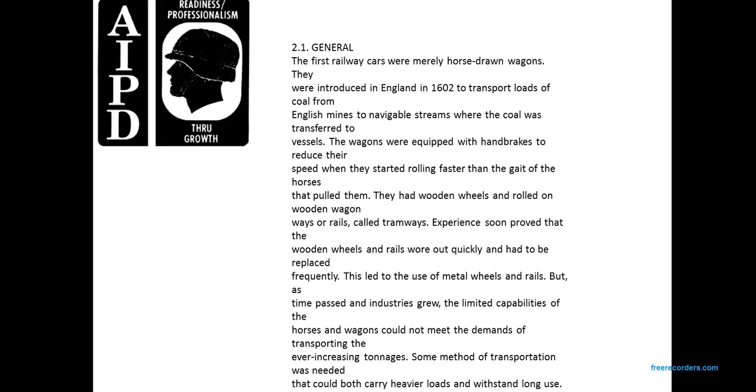The steam locomotive was built to replace the horse, with wooden wagon roadways giving way to iron rails. Later, steel rails were developed. Railway cars were designed and built to replace horse-drawn wagons. The original railway cars were constructed to handle minimum loads, with locomotives, roadbeds, and track structures. Over the years, roadway structures have been improved and equipment made longer, more efficient, larger, heavier, stronger, and safer.

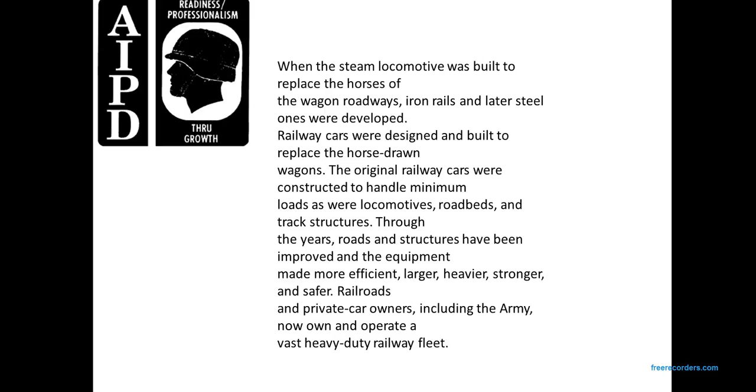Containerization is expanding continually and is being used increasingly; with containers on a flat car, it becomes an all-purpose car. The advantage is fast loading and unloading, freight handling labor is reduced, and damage to the lading is decreased.

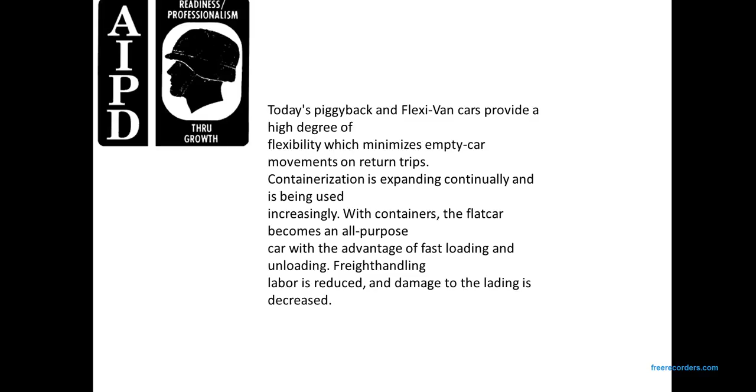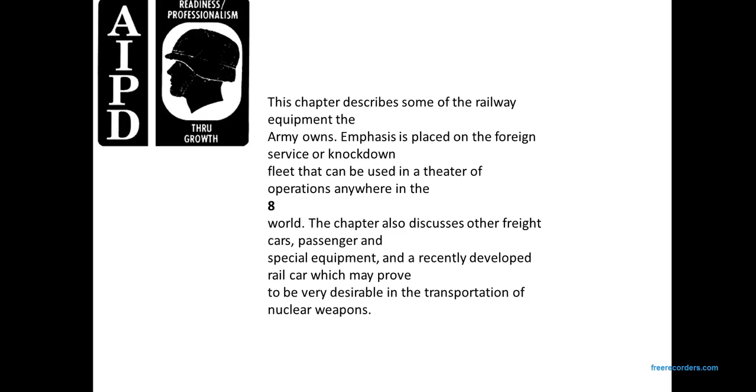This chapter describes some of the Army's railway equipment, with emphasis placed on foreign service knockdown fleets that can be used in theater operations anywhere in the world. The chapter also discusses other freight cars, passenger special equipment, and a recently developed rail car which may prove very desirable in the transportation of nuclear weapons.

2. Rolling Stock. Types of rolling stock: railway rolling stock is classified into 4 types: house cars, open top cars, flat cars, and tank cars. All railway cars, except flat cars, have 6 general components: trucks, brake gear, draft gear, couplers, underframe, and superstructure. The flat car has no superstructure.

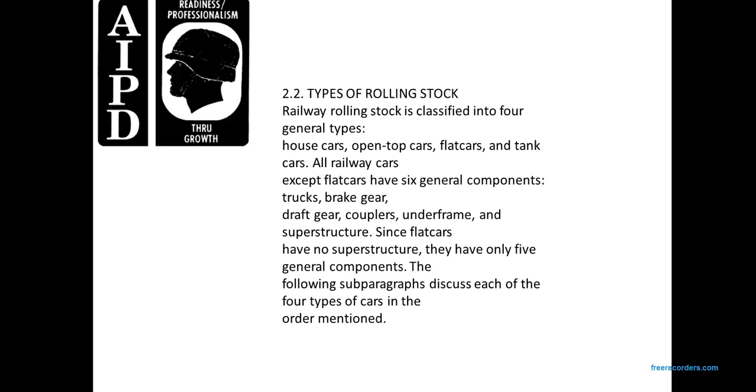The flat car has only 5 general components. The following subparagraphs discuss each of the 4 types of cars in the order mentioned. The house car has an enclosed superstructure with sides, ends, roof, usually doors, vents, ladders, and roof running boards. Boxcars, refrigerator cars, and cabooses are examples. Since boxcars and refrigerator cars are discussed in paragraphs 2.13 and 2.19, only the caboose is described here. A caboose is the car attached to the rear of a freight train.

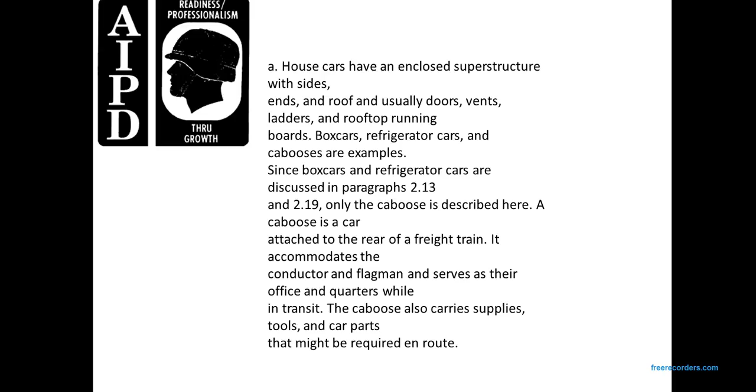It accommodates the conductor and flagman, serving as their office and quarters while in transit. The caboose will also carry supplies, tools, and car parts that might be required en route.

Open top cars, such as the gondola, ballast cars, and hoppers, normally have sloped ends. However, both types of hopper cars, covered and open top, are included in the open top category. The following subparagraphs describe the hopper and ballast car types; the gondola is discussed in paragraph 2.12. Covered hoppers are permanently enclosed, weather-tight cars with fixed sides, ends, and roofs, having openings with weather-tight covers and doors provided in the roof or sides from which the car is unloaded.

For unloading, the car must have openings at the bottom with tight fittings. The covers, doors, ports, or valves in the roof or side openings are where the freight is discharged. Covered hoppers may be partitioned into compartments.

Open-top hoppers are similar to gondolas except that they have higher sides and ends, and generally an interior with self-clearing features, using sloping construction at the bottom of the compartments, with openings at the ends equipped with doors providing discharge for the car's contents. Open-top hopper cars come in many types that vary according to size and commodities carried. Some have twin hopper pockets, while others are quadruple ones, each with doors for discharging the lading.

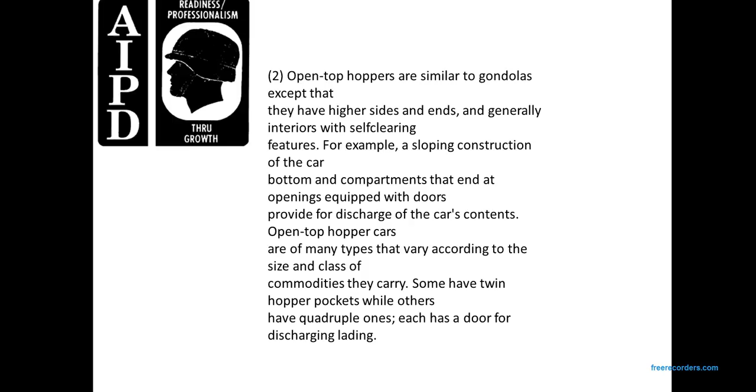Ballast cars are similar to low-side gondolas, except the load may be discharged from the side. Some are referred to as side-dumping gondolas. These cars are used for hauling ballast, sand, gravel, and small loads of coal.

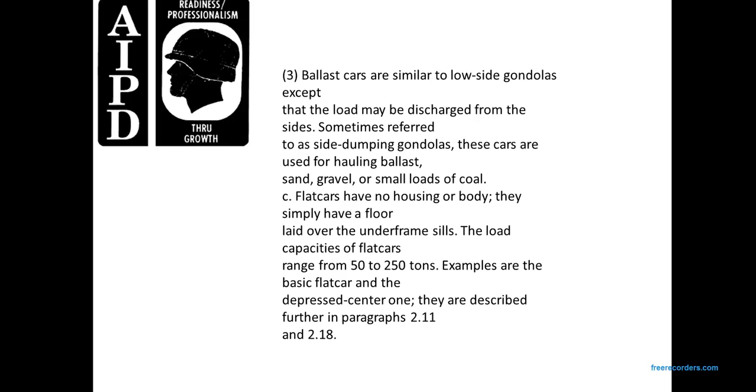Flat cars have no housing or body; they simply have a floor laid on the underframe sills. The load capacity of flat cars ranges from 50 to 250 tons. Examples are basic flat cars and depressed center ones, described further in paragraphs 2.11 and 2.18.

The tanker cars have tanks mounted on special underframes. They may transport liquid or semi-liquid commodities ranging from milk to TNT.

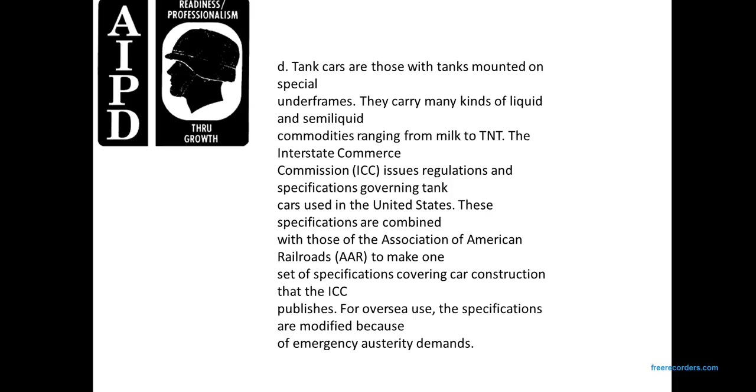Specifications are modified because of the emergency austerity demands. Section 2.3: The freight equipment of the military use.

The railway car being used for military purpose probably occurred during the Civil War, when mortars were permanently mounted on flat cars moved into the area to support troops. In 1917, five naval railway batteries were built and shipped to France for use in World War I campaigns. Each battery consisted of a gun car carrying 14-inch guns and ammunition, workshop, kitchens, berthing cars, and the cars of each battery were probably the first railway cars used entirely for military purpose.

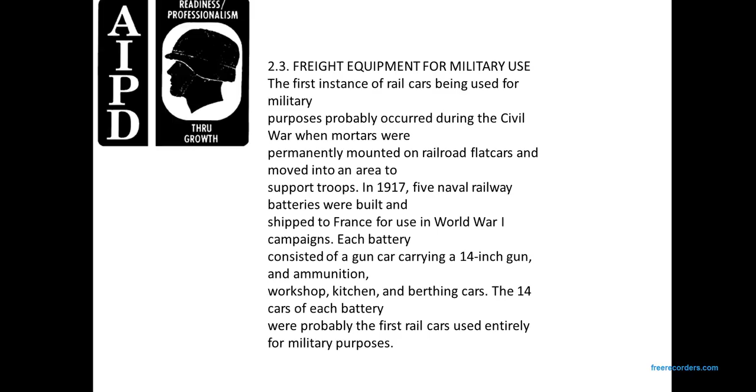Army railway motive power rolling stock built for use in domestic service differed little in design from standard U.S. commercial rail equipment. In comparison to foreign equipment, however, it generally is larger and heavier.

When World War II began, European rolling stock had a smaller carrying capacity and was scarce in all theater operations. Many cars were hurriedly designed and built in the United States and shipped overseas, knocked down to save shipping space. A few American cars were modified for use on the European railroads.

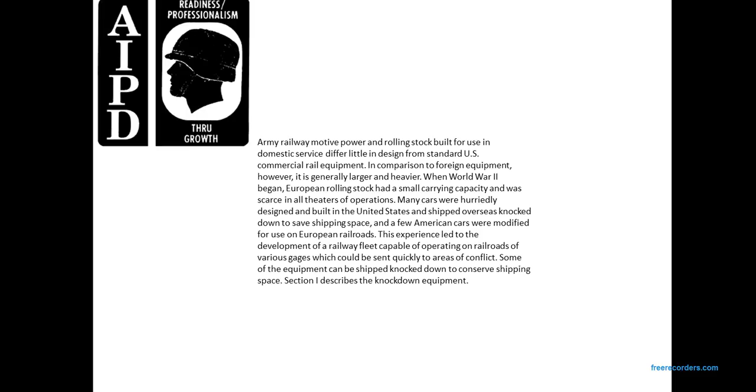For example, experience led to the development of a railway fleet capable of operating on railroads of various gauges, which could be sent quickly to conflicting areas. Some of the equipment could be shipped knocked down to conserve shipping space. Section 1 describes the knockdown equipment: Knockdown Fleet, Section 2.4, General.

Experience of World War I and II showed that foreign railway systems were incapable of sustaining combat operations, because of the capacity amount of foreign railway equipment was not enough for military purposes for the U.S. Army. It was realized that the Army had to be prepared to produce its own motive power and rolling stock should it engage the enemy on foreign soil.

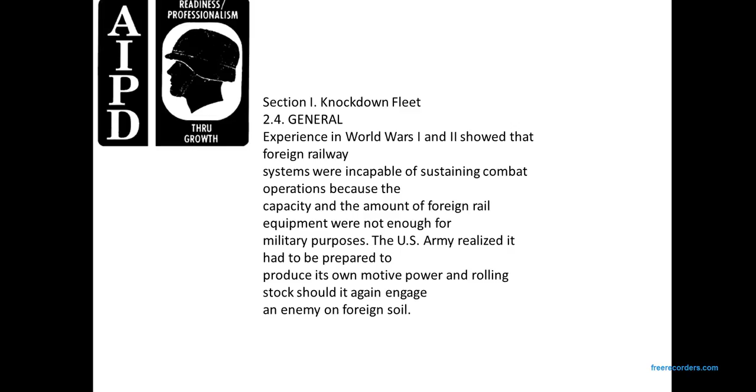Soon after World War II, the Army began to develop a railway fleet, suitable for use in theater operations.

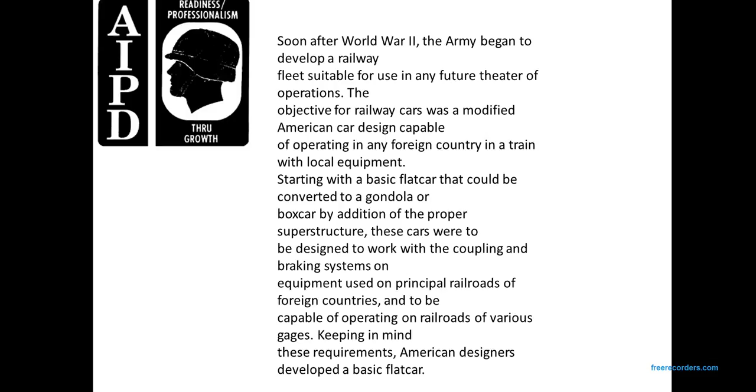Keeping these requirements in mind, American designers developed a basic flat car. In addition to domestic service equipment, the Army inventory contains a knockdown fleet of 40-ton equipment designed and built primarily for emergency overseas service.

Another fleet for use on narrow gauge track in foreign theaters was proposed but not procured. It was to consist of a 76-ton diesel electric locomotive, 30-ton gondolas, 30-ton flat cars, 55-ton depressed center cars, and 40-ton fleet cars, consisting of more than 11,000 items of motive power, rolling stock, and storage.

Various Army depot installations. Paragraphs 2.5 through 2.10 discuss generally the construction components of the cars, the foreign service fleet, and basic procedures for assembling knockdown cars. The remainder of the section, accompanied by figures, describes the car fleet that can be assembled and partially assembled in the theater, and explains their assembly and conversion.

2.5, Construction. Because of the expected shorter life of emergency equipment used in theater operation as compared with standard equipment, the fleet was constructed in a simple, economical as military standards permit. The physical characteristics of foreign railroads would limit the capacity and dimensions of the equipment.

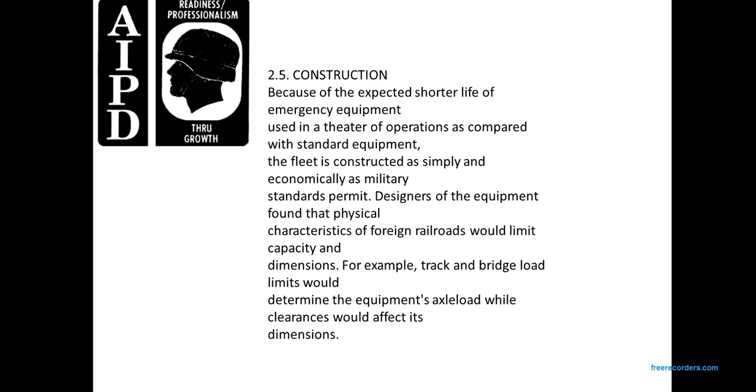For example, track and bridge load limits would determine the equipment's axle load, while clearance would affect its dimensions. The designers decided that a capacity of 40 tons was best to transport military supplies and equipment on the standard to broad gauge of 56.5, 60, 63, and 66 inches.

Design modifications were based on the equipment's shorter life expectancy and regulations expected to govern rail operation in theater. Emergency overseas equipment is designed to meet the clearance and limitations of foreign railroads.

The major assembly components of the different types of knockdown and interchangeable cars are discussed in paragraphs 2.6 through 2.9, which cover the four basic components of a railway car of the knockdown fleet, with the exception of tanker cars. Paragraph 2.10 discusses their assembly.

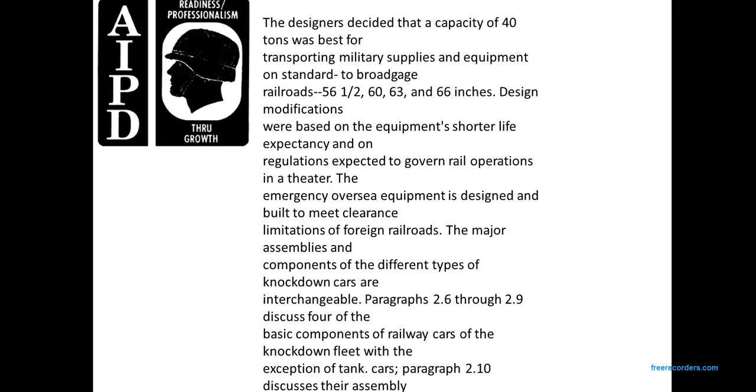The multiple gauge trucks enable the knockdown fleet to operate the railroad on various widths, whether standard or broad gauge.

The trucks can be adapted for different gauges, either the entire truck may be removed and another substituted, or changing the gauge of the wheel once set on the multiple gauge trucks can be accomplished only by general support maintenance units, since the wheel cannot be pushed in or out at will; a heavy-duty wheel press is required.

The multiple gauge trucks can be applied to locomotives, wrecker and locomotive cranes, snow plows, and other railway equipment. Trucks and wheels used in the equipment of the fleet conform to the standards of the U.S. Army and the Association of American Railroads, and are completely interchangeable among cars of the same capacity. However, only the major assemblies are interchangeable among the trucks themselves. A diagram of the typical railway truck is shown in Figure 2.1.

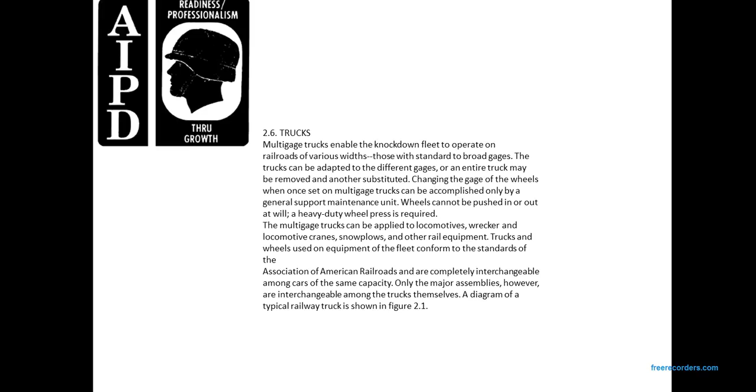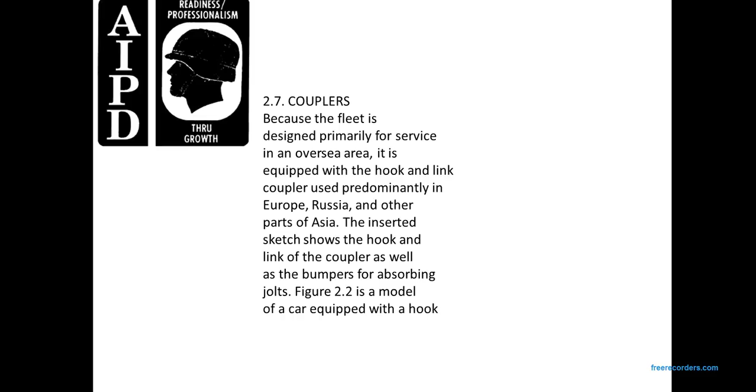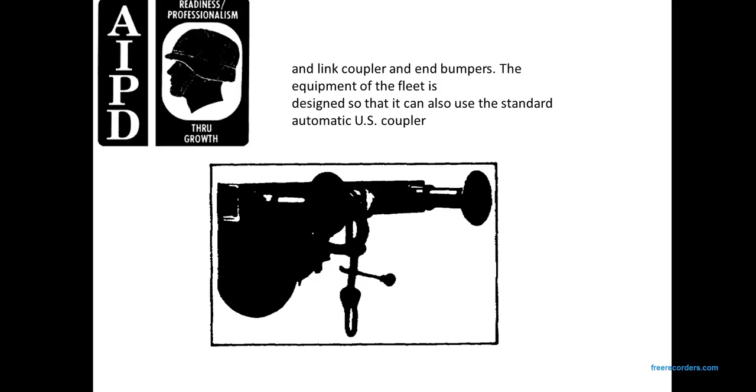Equipment of the fleet uses steel underframes fabricated and drilled in car builder shops in the United States. All underframes for flat cars, gondolas, and box cars are assembled in the same way. A wooden plank floor is laid over the underframe.

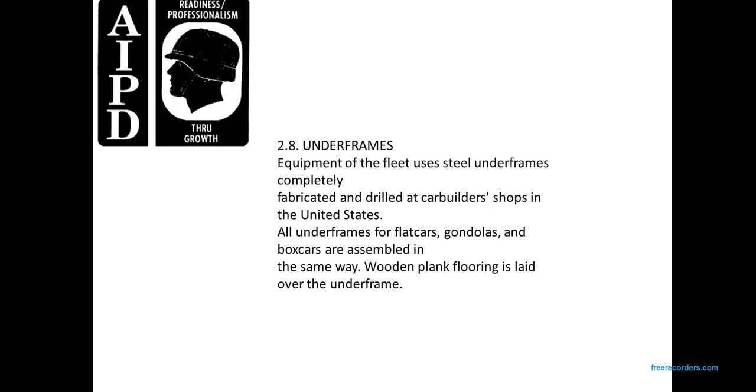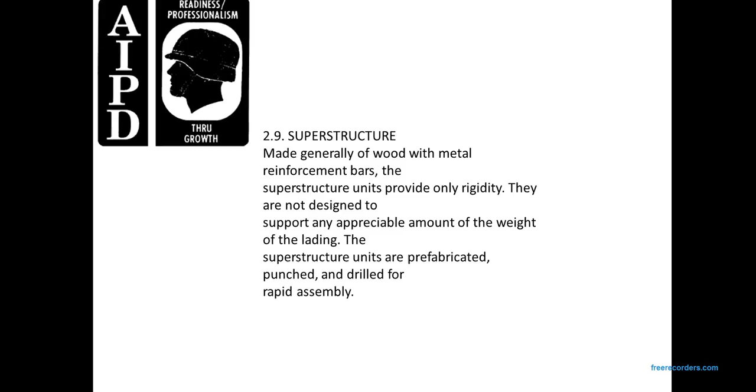2.9, the superstructure, made generally of wood and metal reinforcement bars. Superstructure units provide only rigidity; they are not designed to support an appreciable amount of the weight of the lading. Superstructure units are prefabricated, punched, and drilled, and reassembled for rapid assembly.

2.10, the general method of assembling a car from the knockdown, with the exception of the tank cars, follows: first, assemble the trucks and the underframe. Then, install miscellaneous items of the underframe, including air braking equipment applied to the underframe and end sills, such as the coupling draft gears, buffers, and blocks. Next, mount the underframe assembly onto the trucks.

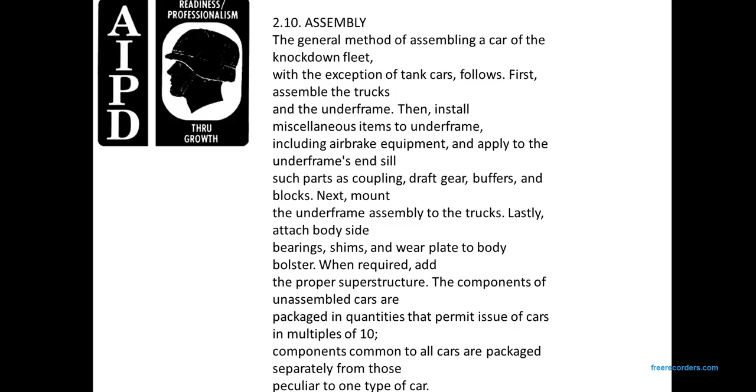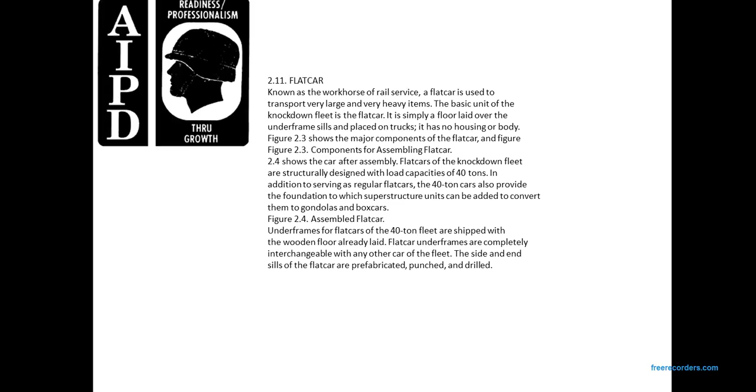2.4, the assembled flat cars. Underframes of the flat cars of the 40-ton fleet are shipped with a wooden floor already laid. Flat car underframes are completely interchangeable with any of the other cars of the fleet. The side and end sills of the flat car are prefabricated, punched, and drilled. This is the underframe of a flat car.

In the theater, the flat car is generally used for very early rail operations. When theater activity stabilizes, requirements to increase transportation and supply need protection from weather or pilferage, so the flat car can be converted to a closed car. After conversion, weight of the lading is still carried by the car bed; the superstructure provides rigidity, not support. Because of its versatility, the flat car is the backbone of the fleet.

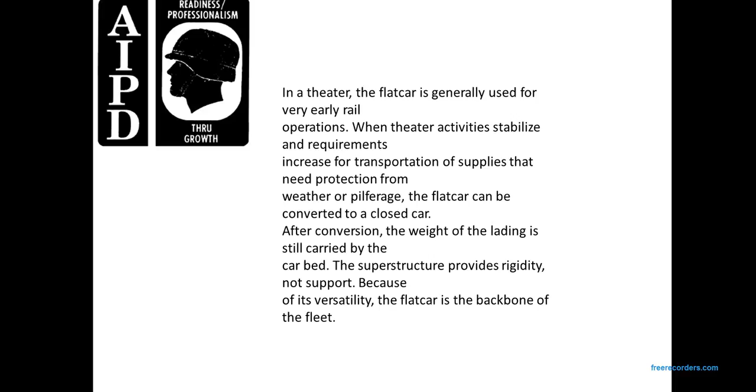2.12, in addition, by adding the sides and ends, the basic flat car becomes a gondola, either high-sided at 48 inches or low-sided at 18 inches. Gondolas may be assembled depending on the height desired; the only difference in the two cars is the height of the superstructure.

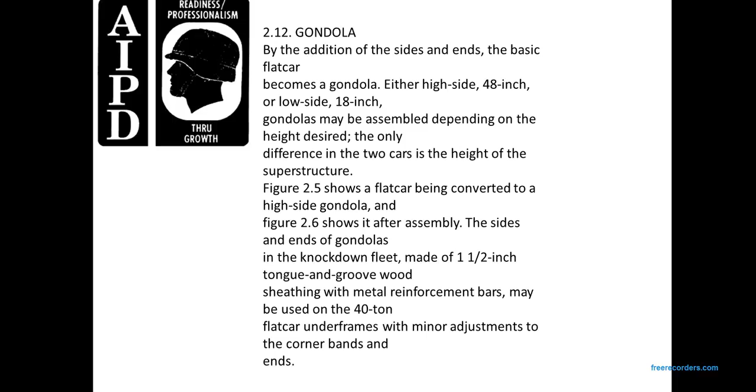This shows a flat car being converted into a high-sided gondola, and after assembly, sides and ends of the gondolas in the knockdown fleet made of 1 1/2 inch tongue and groove wood sheathing with metal reinforcement bars may be used on the 40-ton flat car underframes, with minor adjustments of the corner bands and ends.

This is a gondola car. The conversion of flat car to gondola generally involves positioning sides and underframe sills, securing them with fastening, handholds, positioning ends, assembling, and securing corner posts on all corners of the car. The gondola can transport a variety of heavy bulk items.

They are used primarily for carrying such materials as coal, ore, stone, lumber, iron, steel products, and machinery. If necessary, they can be used to transport troops.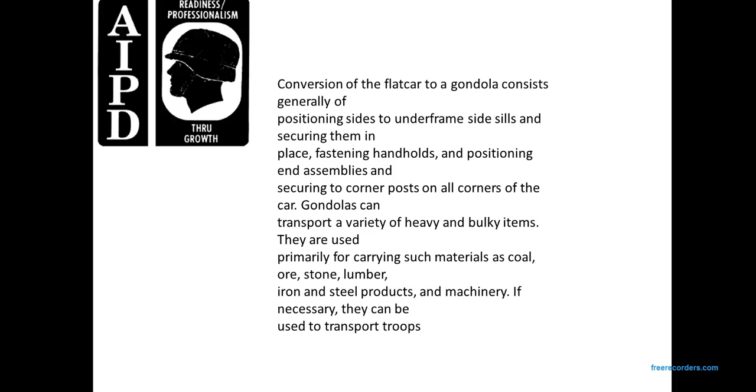2.13. Boxcars, enclosed with the sides and ends having a roof, the boxcar is designed to carry commodities that must be protected from breakage, pilferage, and weather damage, like the gondola.

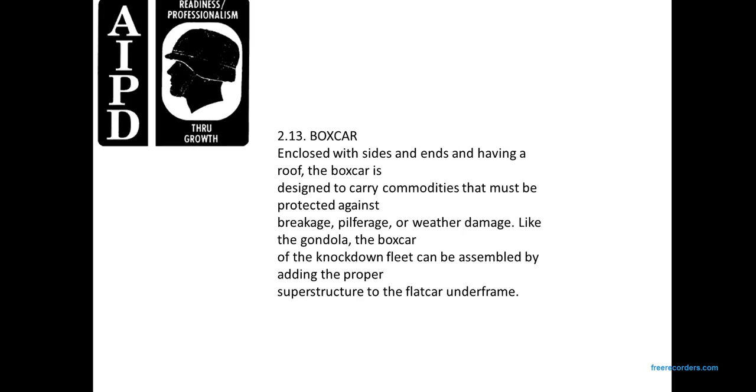The boxcar knockdown fleet can be assembled by adding a proper superstructure to the flat car underframe. Made with a light frame and plywood lining, the superstructure consists mainly of sides, ends, doors, and a roof. The sides are constructed into 4 separate sections, 2 on each side.

The ends are single units. The roof is 1 unit. The door assembly consists of a door track, threshold plate, and door.

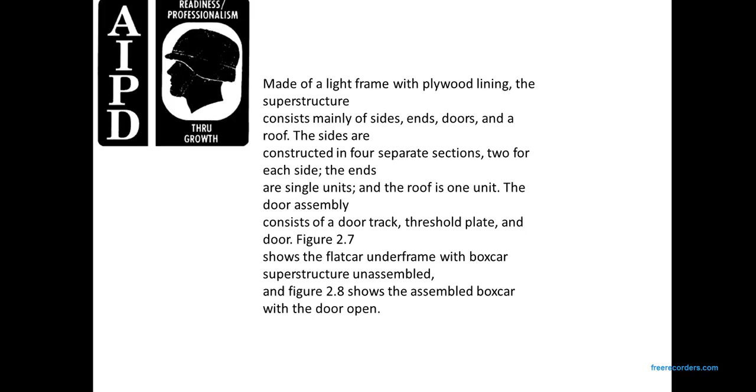This shows the flat car underframe and boxcar superstructure unassembled. Figure 2.8 shows the assembled boxcar with the door open.

To assemble the car, the underframe is assembled the same as the flat car, with the exception of the corner connection angle. A single step and the handholds of the two-sided section adjacent to one end of the car are first attached to the underframe.

The end unit, connecting the two sides, the two-side sections are attached to it and the end sill of the underframe. The same procedure is followed on the other end of the car.

When the side sections and the end units are erected, the door tracks and the doors are put in their proper place. The roof is positioned and secured to the corners and sides.

2.14. The tanker car. A tanker car consists of a tank, usually made of steel, mounted on a modified underframe. Except for the superstructure, the tanker car has components similar to the other cars. The underframe is a...

floored, and steel running boards are built on each side, even with the flooring, made with corrosion-resistant material. The tank shells may have either a single compartment or multiple ones. The ordinary tanker car has a single compartment equipped with dome safety valves and bottom outlets.

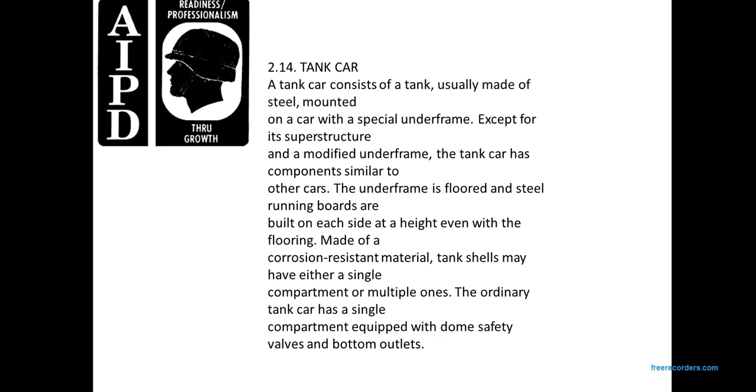Tanker cars are used for the transportation of liquid and semi-liquid commodities such as oils, gasoline, alcohols, acids, coal tar products, compressed gases, fruit juices, and milk. Tank capacities range from 5,000 to 10,000 gallons.

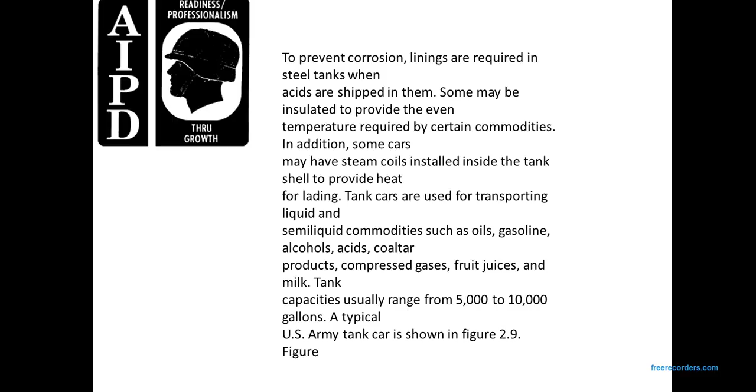A typical U.S. Army tanker car is shown in Figure 2.9. This is a U.S. Army tanker car. Tanker cars in the Foreign Service fleet have single compartments and would normally carry petroleum products.

The 5,000 gallon car operates on a narrow gauge railway, while the 10,000 gallon one runs on a standard to broad gauge track. The car manufacturer assembles the tank unit to the car underframe, along with the outlet and safety valve, with the assembly dome cover.

2.15. The experience of World War II proved that the Army must be prepared to supply its own locomotives, railway cars in a theater of operations, since many foreign countries have just enough rail equipment to support their own needs.

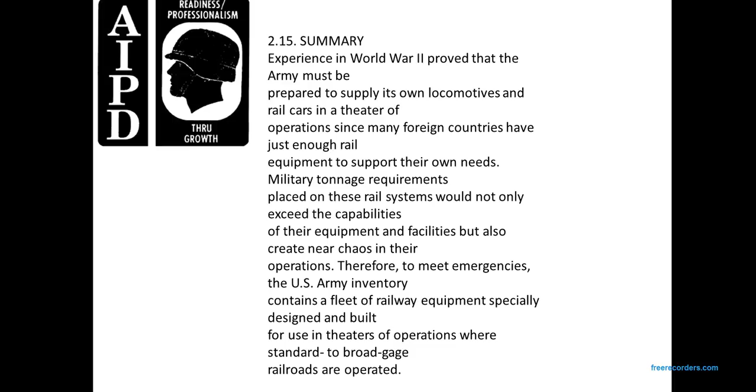Military tonnage requirements placed on their rail systems would not only exceed the capabilities of the equipment and facilities but also create near chaos in their operations. Therefore, to meet the emergency, U.S. Army inventory contains a fleet of railway equipment specially designed and built for use in theaters of operations where standard to broad gauge are operated.

In developing the Foreign Service equipment, designers found that the physical characteristics of foreign railroads would influence the size and capacity. They decided that a capacity of 30 tons was best for equipment that would operate on narrow gauge railroad, and 40 tons for equipment operating on standard to broad gauge.

However, only the 40-ton fleet was procured. The car was fabricated, punched, and drilled at the car builder's shop to provide for easy assembly in the theater.

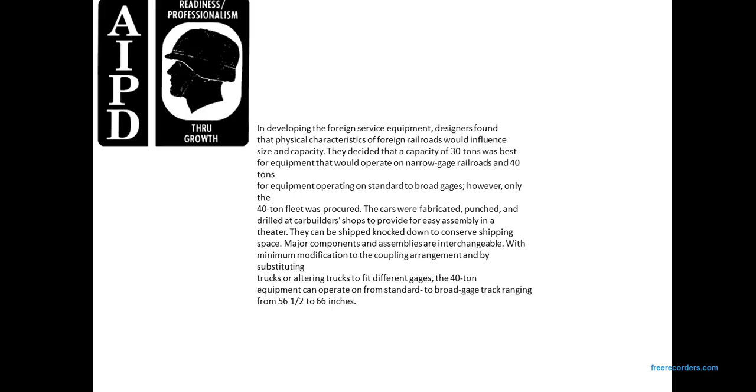They can be shipped as a knockdown fleet. To conserve shipping space, major component assemblies are interchangeable with minimum modifications to the coupling arrangement and substitution of trucks, altering trucks to fit different gauges. The 40-ton equipment can operate on standard to broad gauge track ranging from 56.5 to 66 inches.

The flat car is the basic unit of the knockdown fleet. It can serve as a regular flat car during early theater operations. When theater activity stabilizes, other types of cars are needed, so the flat car can be converted into a gondola or box car.

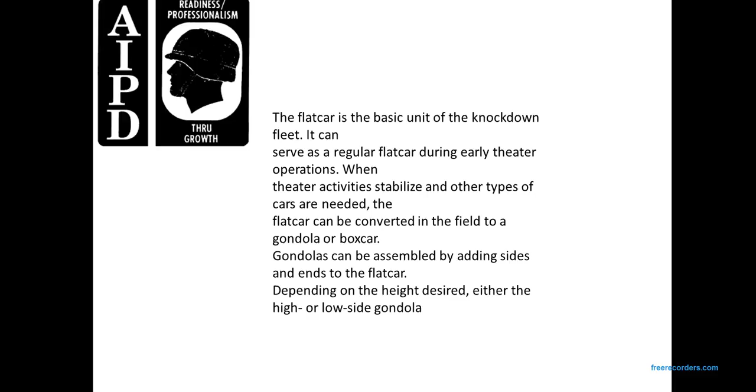The gondola can be assembled by adding sides and ends to the flat car, depending on the height desired. Either a high or low-sided gondola may be erected.

When cars are needed to carry commodities requiring protection from weather or pilferage, the flat car is converted to a box car by the addition of sides, ends, doors, and a roof.

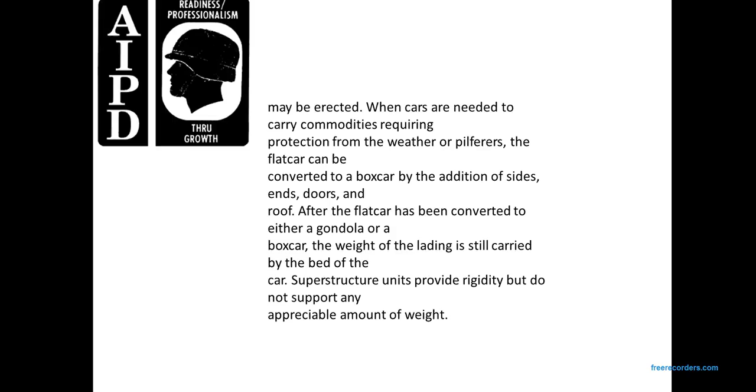After the flat car has been converted to either a gondola or box car, the weight of the lading is still carried by the bed of the car. Superstructure units provide rigidity but do not support any appreciable amount of weight.

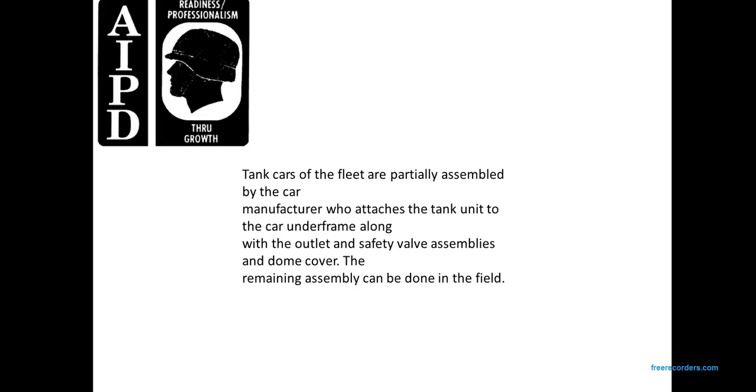Tank cars of the fleet are partially assembled by the car manufacturer, who attaches the tank unit to the car underframe along with the outlet, safety valve assemblies, and dome cover. The remaining assembly can be done in the field.

Section 2, Other Equipment.

216. General. In addition to the knockdown cars described in paragraphs 211 through 214, some heavier weight freight cars, some passenger cars, and some equipment built for special purposes are included in the foreign service fleet. This section discusses the rolling stock in addition to some of today's newer developments in rail equipment.

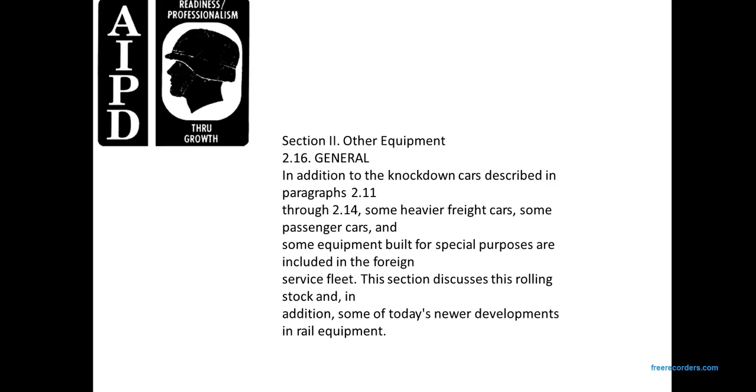217. The 80-ton flat cars. Some of the 80-ton flat cars are included in the overseas fleet, carrying ordnance and engineer equipment weighing more than 40 tons. An example is seen in figure 210, similar to the 40-ton flat cars.

Each of the cars is mounted on two 6-wheel trucks. The 3-axle trucks are used to avoid exceeding the allowable axle load on foreign railway tracks, bridges, and other rail structures, which are designed to support a certain amount of weight per axle. With a 6-wheel truck, weight is distributed evenly over a greater area than with a 4-wheel truck.

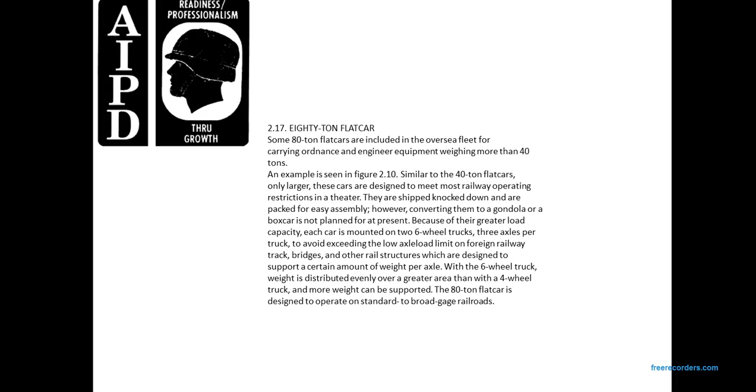218. The depressed center flat car. Flat cars with a low, depressed center are designed and built for transportation of ordnance, engineer material, and equipment that would exceed the permissible heights of loaded on regular flat cars.

This is useful mainly because of the added headroom it affords for clearance. The 70-ton depressed center flat car designed for foreign service has two 6-wheel trucks, as shown in figure 211, and operates on the standard broad gauge of 56.5 inches to 66 inches.

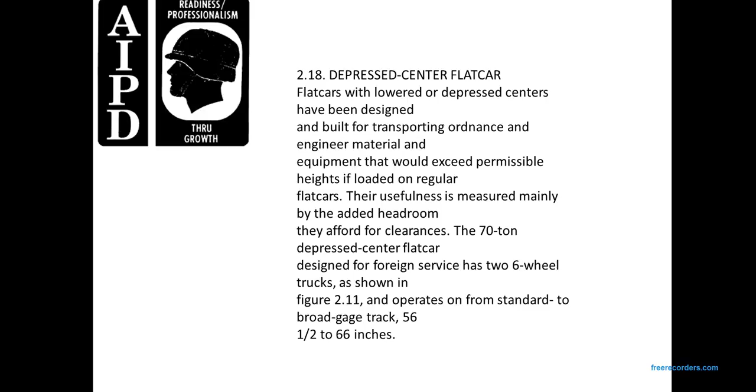219. The refrigerator car. Refrigeration is important for moving perishable items. Controlling the temperature is essential to protecting such food as fresh fruits and vegetables from freezing in transit. Refrigerator cars can be used for both purposes: to keep commodities cool and to protect them from too much cold.

A car can be cooled with ice or by mechanical means. Standard refrigerator cars resemble the box car in general outward appearance. The framework, sheathing, ends, and roof are similar to those of the standard boxcar, except that insulation has been added. On an ice-cooled refrigerator car, the roof has openings from which the ice is loaded.

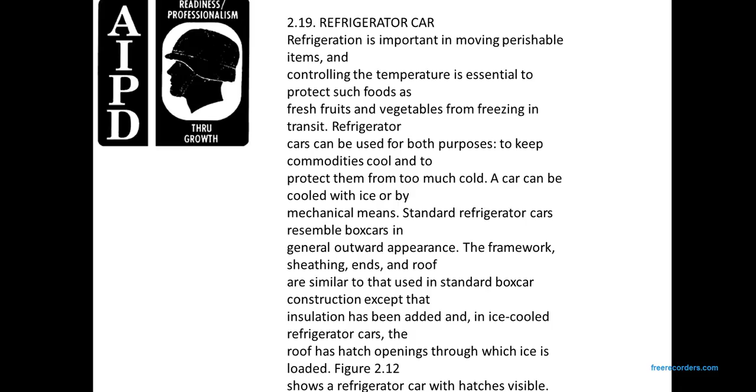Figure 212 shows a refrigerator car with its hatches visible.

Refrigerator cars developed for the foreign service fleet are 40-ton, 8-wheel, ice-cooled cars. They have the same type of underframe, trucks, brake, and coupler arrangements as the other cars in the foreign service fleet, and the superstructure outside of the sheathing is plywood.

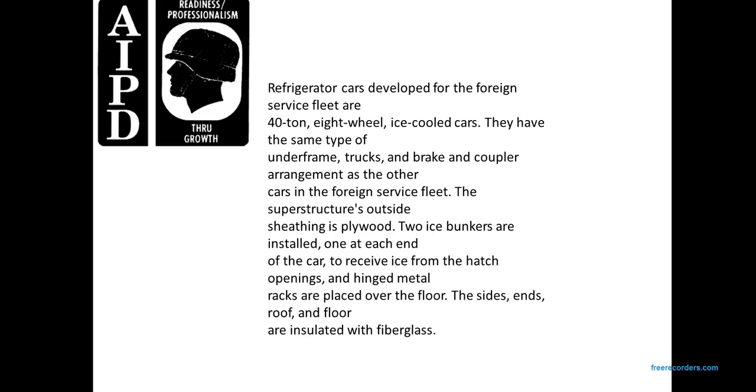Two ice bunkers are installed, one at each end of the car, to receive the ice from the hatch openings, with hinged metal racks placed over the floor. The sides, ends, roof, and floor are insulated with fiberglass. Here is a refrigerator car.

2.20. The passenger equipment car. The ambulance train cars are the only passenger equipment included in the Foreign Service fleet because of the experience of the Army Medical Service during the Korean and Vietnam Wars, the rapid development of air transportation, and the quick evacuation of the wounded from combat.

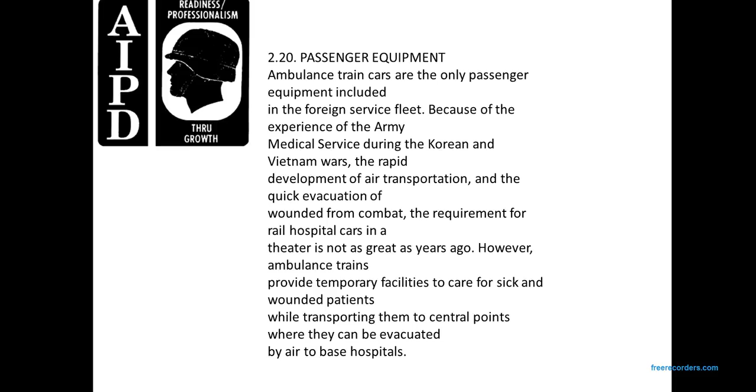The requirement for the rail hospital car in the theater is not as great as years ago. However, the ambulance train provides a temporary facility to care for sick and wounded patients while transporting them to center points where they can be evacuated to base hospitals by air.

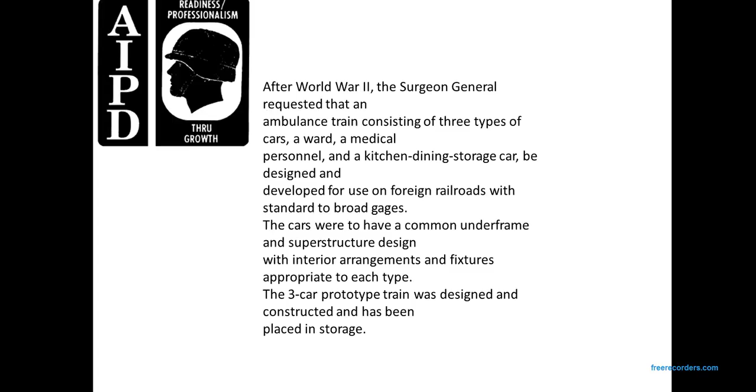After World War II, the Surgeon General requested that ambulance cars consist of three types of cars: a ward, a medical personnel, and a kitchen, dining, storage car, designed and developed for use on foreign railroads with standard to broad gauges. The cars would have common underframe, superstructure design, interior arrangements, and fixtures appropriate to each type. The three-car prototype train was designed and constructed and has been placed in storage.

The cars of the ambulance are constructed of steel and have interchangeable underframe and superstructure components. They are built to resist greater impact forces and provide maximum safety and comfort. They have multiple gauge four-wheel passenger type trucks. The coupler arrangement is designed to permit rapid conversion to another coupling arrangement for standard to broad gauge trains.

Each car is insulated, ventilated, and equipped with heating, power generating plants, and a water supply system. Only the ward car is air-conditioned. The car windows are designed for complete blackout. The three cars of the train are designed to operate as a unit furnishing complete railway ambulance facilities. Each type of car is discussed in the following subparagraphs.

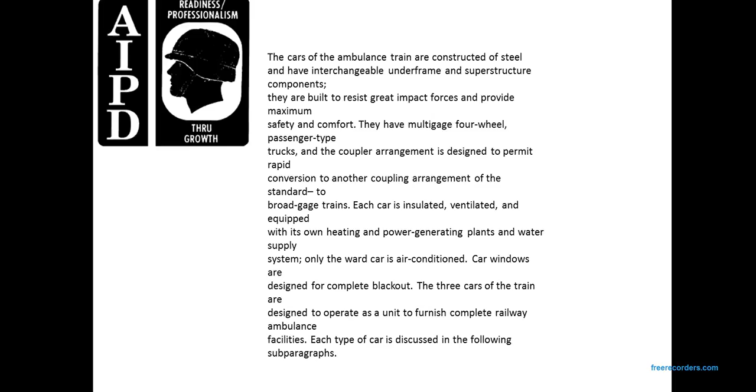A ward car is located midway on both sides of the center aisle. The ward car has tier bunks to accommodate 30 litter patients, or 12 litter and 24 ambulant patients. 6 bunks are stationary, and 24 can be converted to seats.

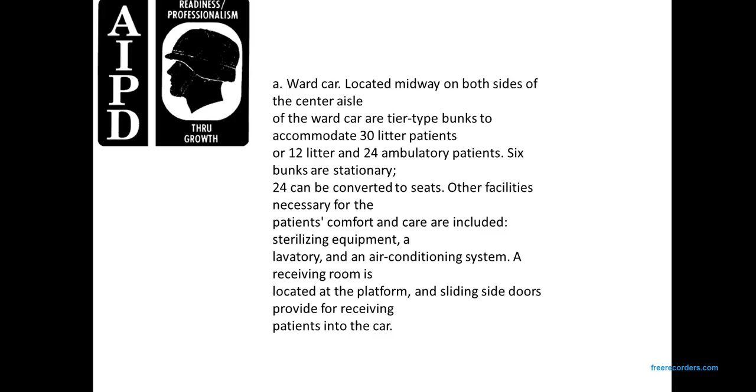Other facilities necessary to the patient's comfort and care are included: sterilizing equipment, a lavatory, and an air conditioning system. A receiving room is located at the platform, with sliding side doors provided for receiving patients into the car.

B. Medical personnel. Personnel of the Army Medical Service are provided with sleeping quarters, dressing rooms, and toilet facilities in the medical personnel car. It is equipped with two air circulating blower units and contains staterooms for 4 officers, 2 nurses, and 15 enlisted men.

And dining areas, with tables to seat 24, and a cleaning area containing a service sink and storage space for medical food, cleaning supplies, and equipment. This car also has an emergency water supply.

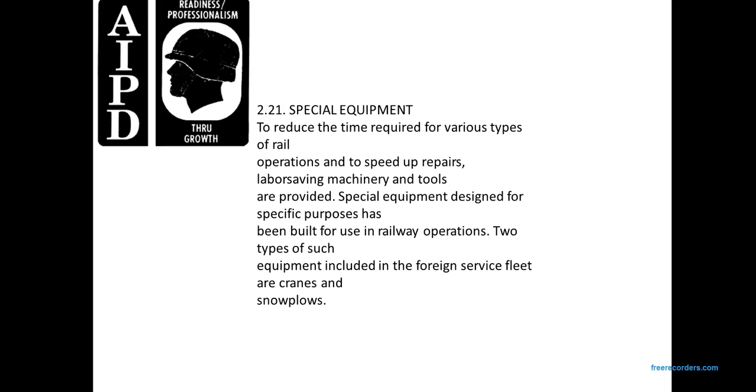2.21. The special equipment. To reduce the time required for various types of operation and to speed up repairs, labor-saving machinery and tools are provided. Special equipment designed for specific purposes has been built for use in railway operations. Two types of such equipment included in the Foreign Service fleet are cranes and snow plows.

Cranes aid in loading and unloading cars and moving supplies and material. Cranes help to speed up many railway operations, clearing railway lines when traffic has been interrupted by washouts, landslides, wrecks, and other causes.

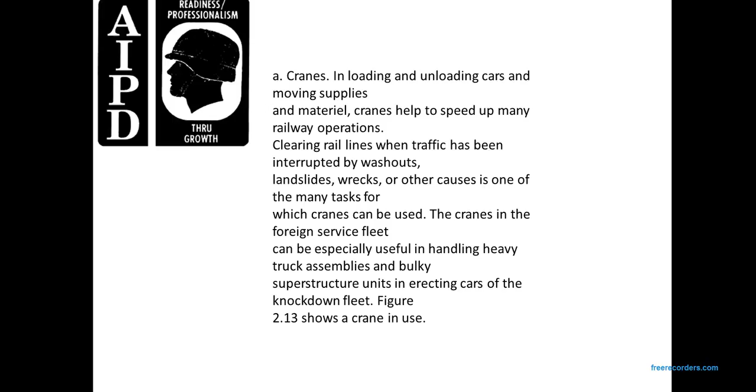Of the many tasks for which the crane can be used, the crane in the Foreign Service fleet can be especially useful in handling heavy truck assembly, bulky superstructure units, and erecting cars from knockdown fleet. Figure 2.13 shows a crane in use.

Here's another one: the snow handling equipment. Clearing snow or ice from the railway is important to keeping the railroads operational. Here is the snow handling equipment in the Foreign Service fleet.

The fleet operates year-round. This multiple purpose track maintenance equipment additionally clears ice and snow from the tracks during the winter. This snow plow is also called the spreader ditcher car.

Some of the Army's highly refined weapon systems, such as missiles, rockets, and nuclear warheads, pose special transportation problems because of their size and sensitivity. While in transit, those weapons may be damaged by handling and environmental conditions. Therefore, special care must be taken in moving and protecting them.

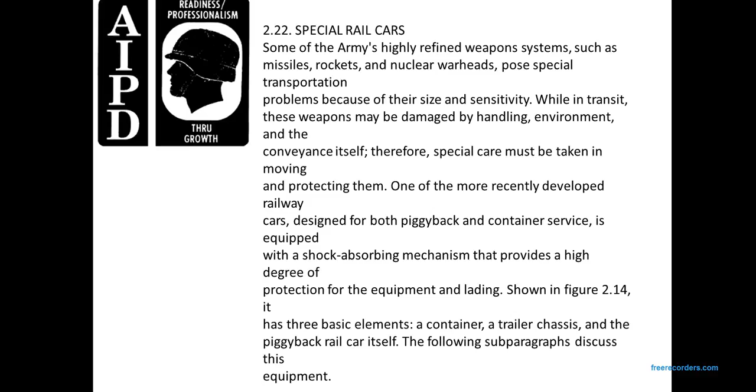One of the more recently developed railway cars is designed for both piggyback and container services, equipped with a shock-absorbing mechanism that provides a higher degree of protection for the equipment. The lading, shown in Figure 2.14, has three basic elements: a container, a trailer chassis, and the piggyback rail car itself. The following sub-paragraphs discuss this equipment.

The piggyback car container is specifically designed and built to be interchangeable between road, rail, and ship containers. That is key to containerization transportation. It can be used for lift-off, roll-on, or roll-off services.

The container has built-in lifting eyes, stacking castings on all four corners, and is engineered to withstand the stress of lift-on or lift-off operations, as are used at ports, rail terminals, and loading docks.

The corner posts of the construction permit stacking of fully loaded containers. These design features are particularly desirable in ship operations where a crane is one practical means of loading and unloading containers. Some containers have fork pockets that enable them to be loaded and unloaded by forklift trucks.

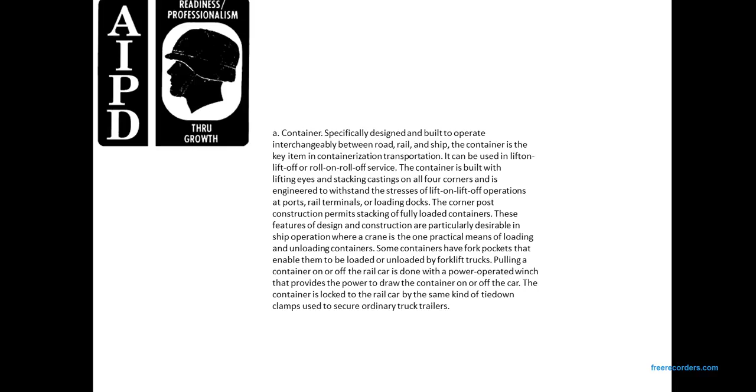Pulling the container on or off the railway car is done with a power-operated winch that provides the power to draw the container on and off the car. The container is locked onto the railway car using the same kind of tie-down clamps used to secure ordinary truck trailers. The trailer chassis is designed and built to accommodate the container.

The trailer chassis has a device to lock and unlock the container easily and quickly. The chassis is moved by the truck tractor, operating on either rough country roads or smooth city streets. The chassis is equipped with piggyback adapter equipment so that it can be driven on and off the piggyback railway car. From front to rear, it is engineered and built for container services.

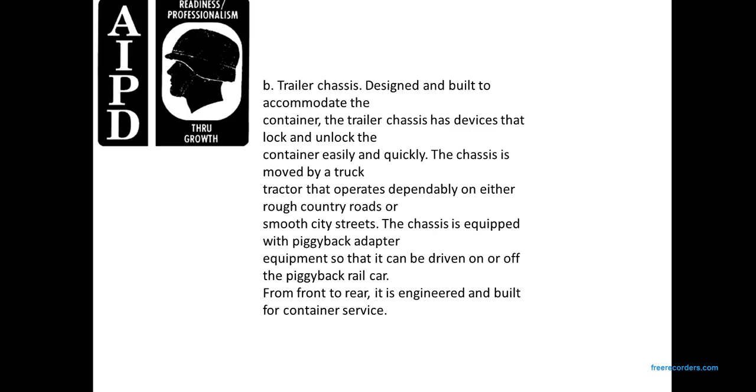The piggyback railway car is designed exclusively for container piggyback services. It is equipped with a shock absorber that absorbs 75% of the shock the car receives. A guide automatically aligns the container to the trailer so that loading and unloading is smooth and a continuous hands-off operation. Automatic tie-down hitches are operated when the truck tractor backs down onto the railway car, securing the trailer containing the shock absorbing mechanism.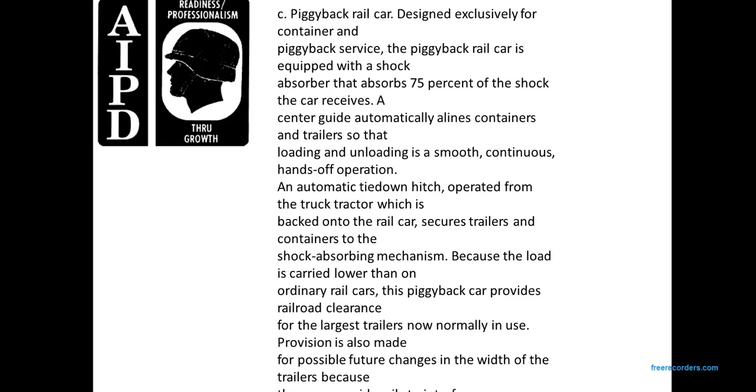Because the load is carried lower than on ordinary rail cars, this piggyback car provides greater railroad clearance for the largest trailers normally in use. Provision is also made for future changes in trailer width, because there are no side rails to interfere. Mixed loads of containers and conventional trailers can be carried on the piggyback railway car without modification.

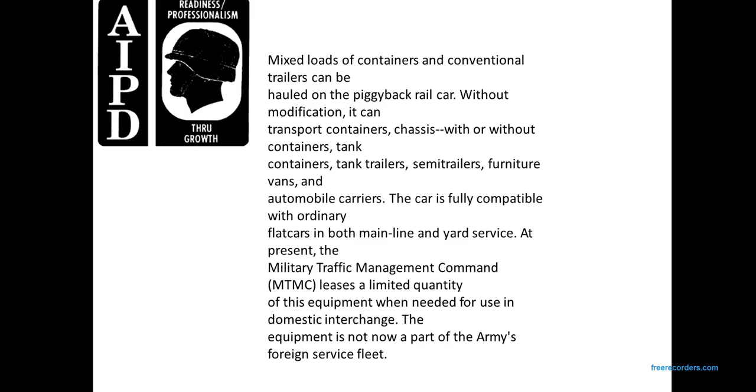It can transport containers, chassis with or without containers, tank containers, tank trailers, semi-trailers, furniture vans, and automobile carriers. The car has the full capability of ordinary flat cars for both mainline and yard service. At present, Military Traffic Management Command (MTMC) leases a limited quantity of this equipment for use in domestic interchange. This equipment is not now part of the Army's Foreign Service fleet.

2.23. The Foreign Service Fleet. The Foreign Service fleet contains special freight cars, such as the 80-ton depressed center flat car for carrying large, very heavy ordnance and engineering equipment, including a fleet of ice-cooled, fiberglass-insulated refrigerator cars to carry perishable items, as well as cranes and snow handling equipment to speed various jobs and keep railroads operational.

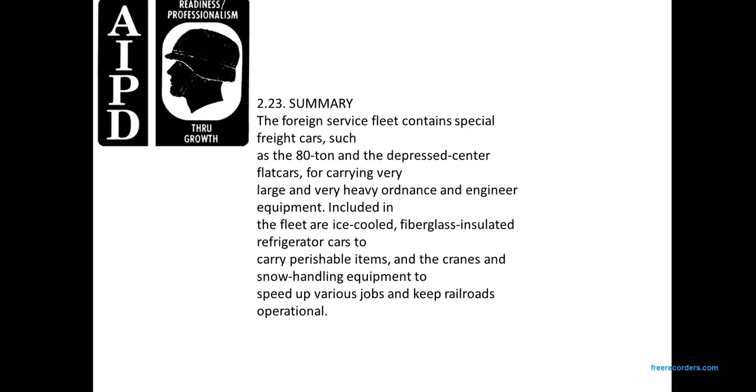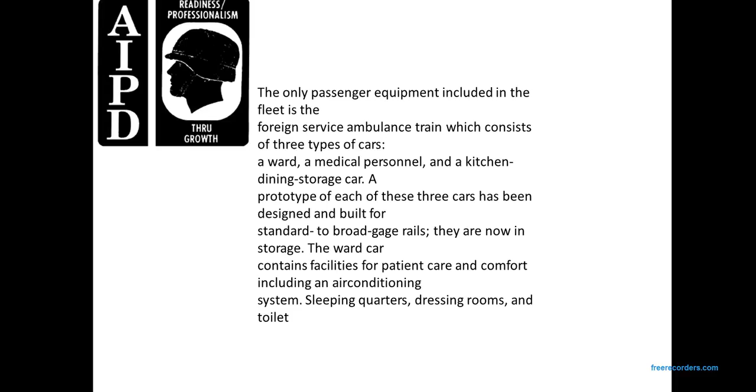The only passenger car included in the Foreign Service fleet is the ambulance train, which consists of three types of cars: a ward car, a medical personnel car, and a kitchen, dining, and storage car. A prototype of each of these three cars has been designed and built for standard and broad gauge rails; they are now in storage. The ward car contains facilities for patient comfort, including an air conditioning system, sleeping quarters, a dressing room, and toilets.

Facilities are also included in the medical personnel car. The kitchen and storage car contains a kitchen with facilities to prepare complete meals, and a dining area where meals are served. A cleaning and storage area contains a service sink and a small space for storing supplies.

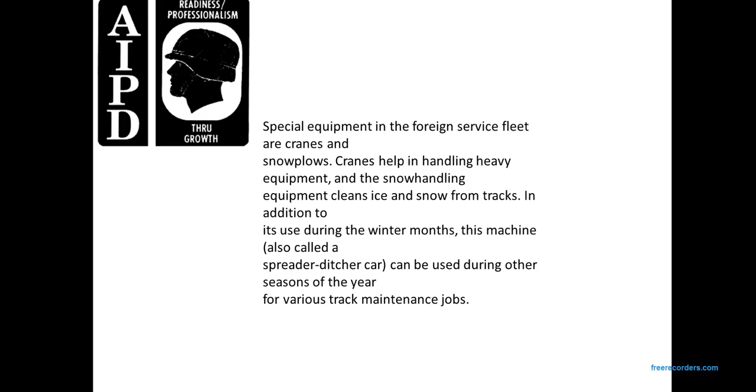Special equipment in the Foreign Service fleet includes cranes and snowplows for handling heavy equipment. The snow handling equipment clears ice and snow from the tracks. In addition to use during winter months, this machine, also called the spreader ditcher, can be used during other seasons of the year for various track maintenance jobs.

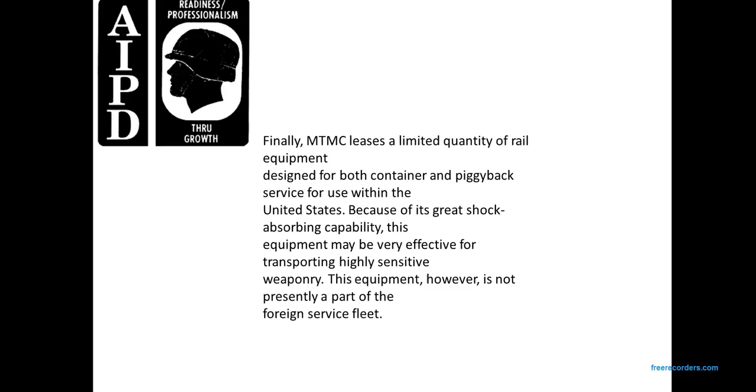Finally, MTMC leases a limited quantity of the railway car designed for both container and piggyback services for use in the United States because of its greater shock absorbing capability. This equipment may be very effective for transporting highly sensitive weaponry. However, it is not currently part of the Foreign Service fleet.

Chapter 3: Maintenance of Equipment.